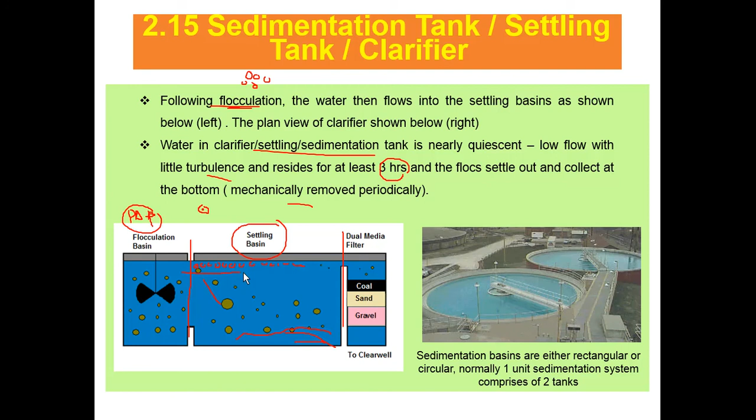Floating, dissolved floating floc - this is another treatment process. In the floc they trap air, so the floc will be suspended, floating on the surface, so they can remove the floc from the surface. This process we call Dissolved Air Flotation, DAF.

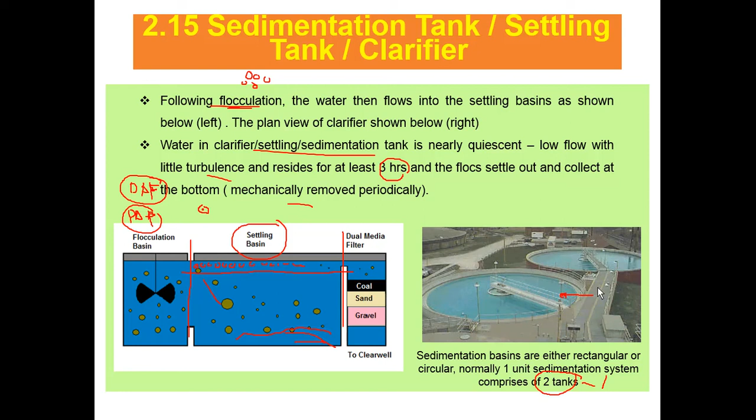In this topic we just introduce the typical process for floc settling. This is the figure for the sediment basin, either rectangular or circular. Normally one unit sedimentation system comprises two tanks - one as backup in case one breaks down or is not functioning, so the water treatment process can still continue.

This is the typical sediment tank - we have rectangular and circular types, with radial flow from the center. Radial flow, hopper bottom, upward flow - the flow goes down and then up. This is the typical sediment tank.

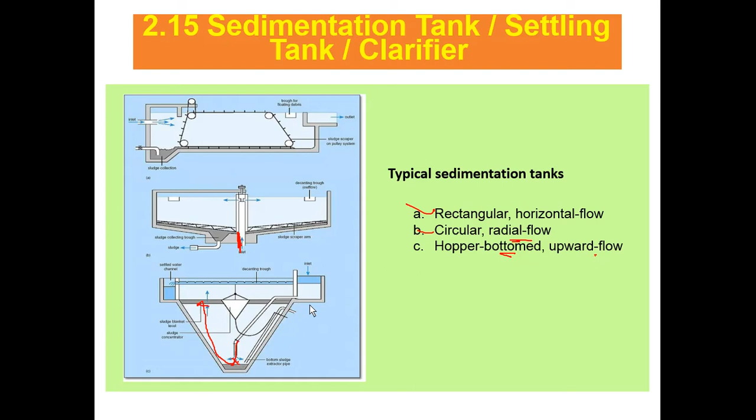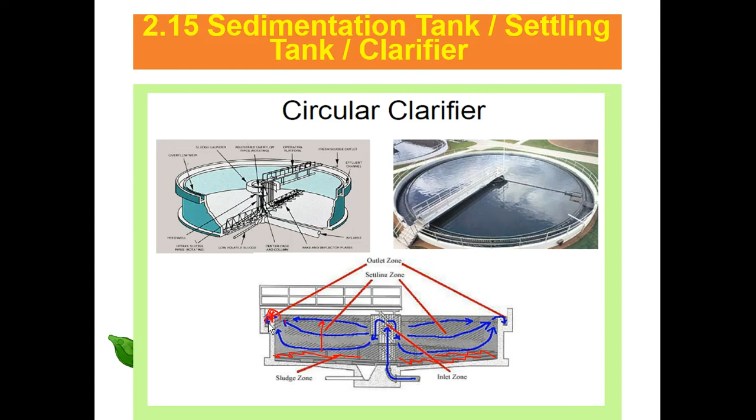Radial flow, close to radial. At the bottom, the floc settling area is the surrounding circular area, and the clean water is at the upper part, where there is a weir leading to the outlet. So they go to the next process for filtration.

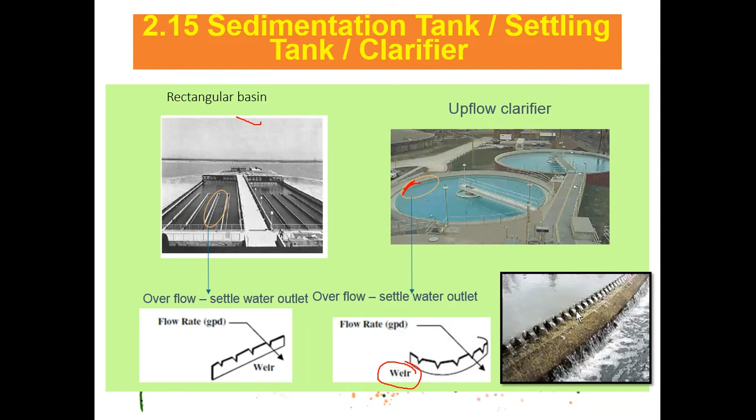The length in meters represents the length of the weir. For example in a circular tank, how long is the weir length in meters - this is for the surface area, to evenly distribute the flow and suspension across the section of the settling zone. This is the inlet, depending on the method of clearance, the frequency of clearance, and the quantity of sludge estimated to be produced.

The purpose is to remove the settled water from the basin without carrying away any floc particles. This is the outlet, where the weir is located. No more floc - all based on the design, all the floc will be settled down in the sludge zone.

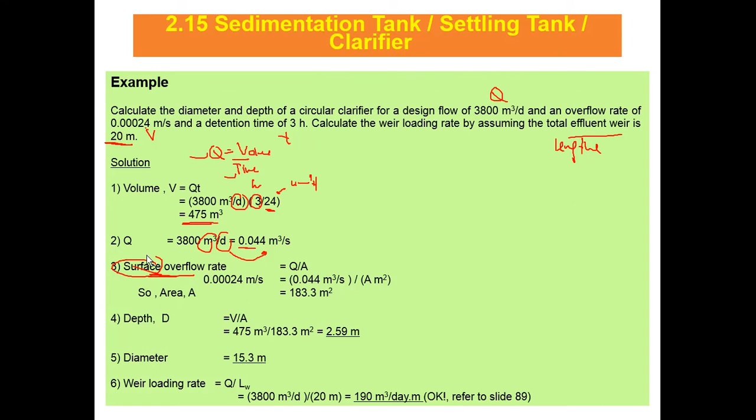Surface overflow rate, surface, this one surface. So bila surface, let's say we have the rectangular sediment basin. Okay, this area is what we want to compute. Kalau circular, okay, so this surface circular, okay circle. So this area, we call this the surface area.

So we know for the surface Q over A. Okay, surface flow rate equal Q over A.

Okay, overflow rate dia daripada permukaan lah, dia akan fill up to fill the area. So Q over A. Q yang kita guna adalah Q ni here. Okay, so surface Q ni, V ni overflow rate ni represent for surface flow rate. Dia berbeza, different with the...

Okay, this velocity ni adalah rate dia, velocity ni adalah surface flow rate. Okay, surface overflow flow rate. Q dah tahu, so we can get the A equal 183.3 meter square. So A ni, A represent rate ni, A.

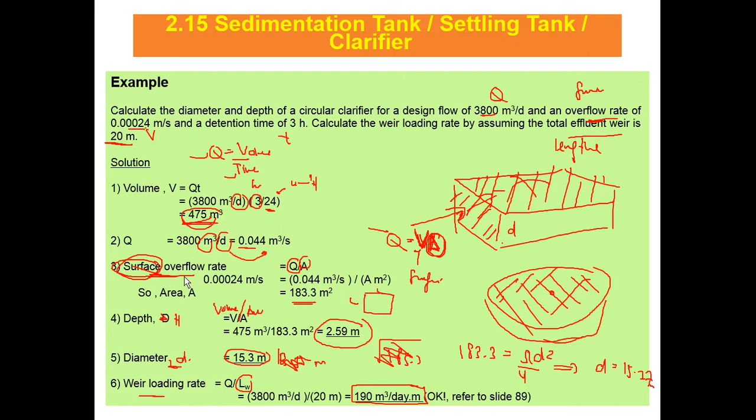Okay, so first convert the unit. Okay, so you dapat meter cube per day. So surface area you tahu tadi, Q equal VA. Okay, so V, Q dah ada. Okay, Q dah ada, this one.

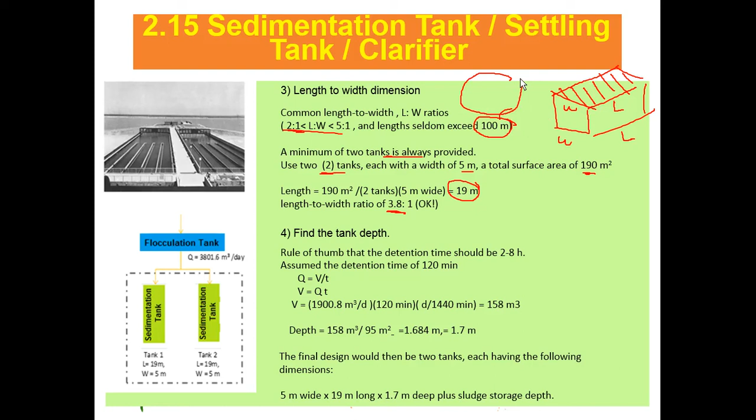It's rare to exceed 100 meters because of the surface area of the treatment plant. If they get the length to 100 meters, better they change the sediment tank from rectangular to circular, so they can save space.

So you need to check here. The 10 we calculated earlier gives 190 meter square, so we divide by 2, it becomes 190 divided by 2, so they get 95 meter square for each rectangular sediment tank. So you divide by 5, you get 19 meters for length for each rectangular basin.

Rectangular tank, there are 2. So here 19, here 19, divided by 2 because there are 2 tanks. Let's check the space between here, okay.

So find the tank depth. Rule of thumb, the detention time should be 2 to 8 hours. This is the guideline I'm explaining here. You should know the basic guideline to design - they have three conditions: surface overflow, detention time, overflow.

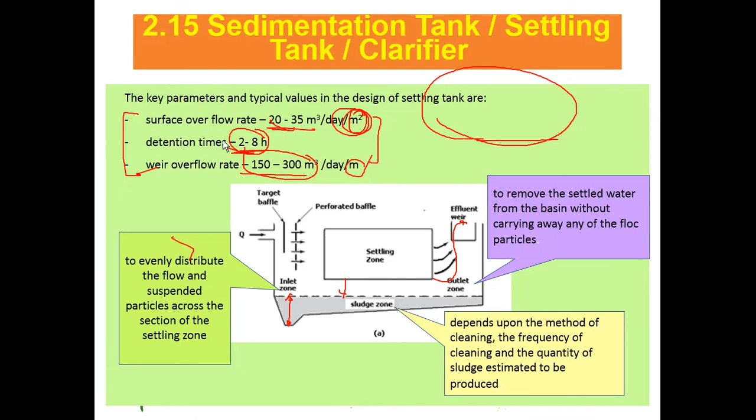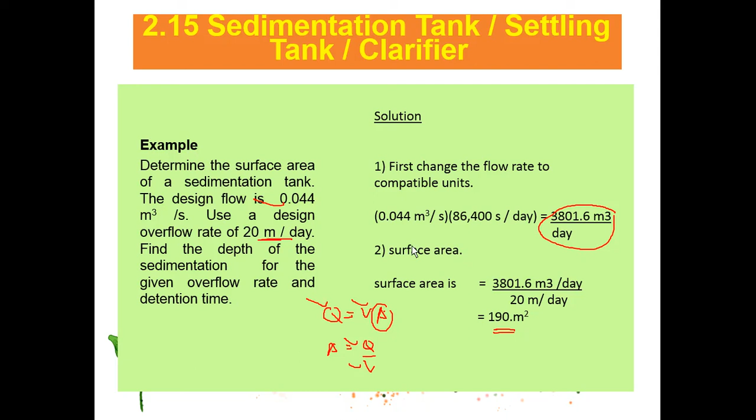So let's say we do for the minimum time, so we get Q equal to 1900.8 meter cube per day. Where does this 190 come from? It comes from here, this one is for all. This 190 is because we have two tanks.

So 3801.6, we divide by 2. So each tank, they divide the Q. 3801.6 splits into 2, Q1 and Q2, tank 1 and tank 2.

So we divide by 2, so they get 1900.8 for the Q. So divide by Q, already known. So velocity, we need to get the velocity. So Q multiply by T, so T is 120, so this one day, you convert the unit.

This one is not velocity, this is volume. Be careful with volume and time - if velocity multiply with A, Q equals V times A. This one, if you use this, this is velocity. This one is area. Q equals V over T. So this one represents volume, this one represents time.

So be careful, which one? Don't get it flipped - this one is not volume, this one is velocity times area. So look at the units - volume, area. Meter per second times meter square, multiply by square, so you get meter cube per second, so that's volume. Make sure meter per second is velocity, meter square is area. This one volume meter cube, time in seconds, typical unit, so you get meter cube per second. So back to the basic unit, to avoid mistakes.

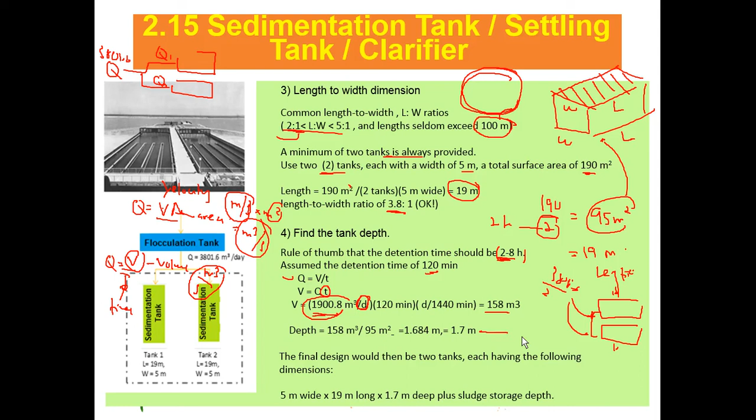So you get the volume 158 meter cube. The 95 comes in here, 95 here, because it's for each tank. This one is for each tank. So you need to know this is for each tank. So the final two tanks, for each tank, is here.

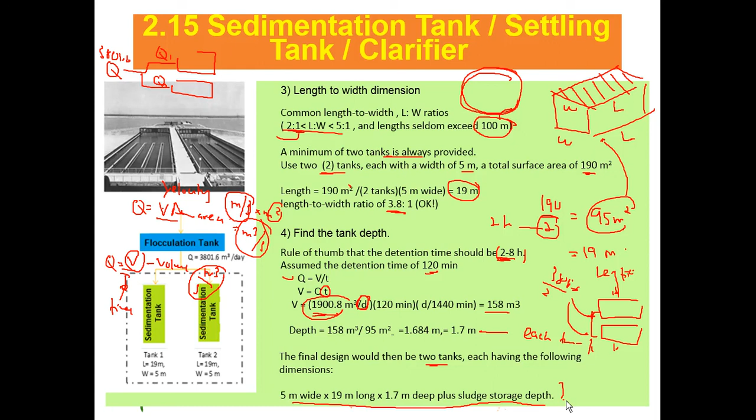This is his design, this is the way you can design for the sediment tank. Basic formula - because this course is just for environmental engineering, so at least you know how to design the basics for the sediment tank. For advanced design, you need to take an elective course for designing water treatment plants. That elective course will teach you more detail.

So in the sediment tank, we have three types - type 1, type 2 and type 3. This type will depend on the floc of the particle, the type of particle. If settling is a discrete particle at constant settling velocity, with no fluctuation during sedimentation, we design for type 1 sediment. For particles that aggregate into floc during sedimentation, you need type 2 - sediment after alum or iron coagulation.

In wastewater treatment, we commonly find this design in the primary sedimentation tank after trickling filtration and in the upper portion of the secondary clarifier after activated sludge treatment. If the particle settles at the zone or blanket, usually there's a clear interface between the settling sludge. This is Type 3.

In water treatment, this settling occurs in lime soda ash sedimentation. For wastewater, it occurs at the activated sludge sedimentation or sludge thickeners. This was Type 1, which I explained earlier. Type 1, Type 2 - this depends on the particle mechanism, or behavior.

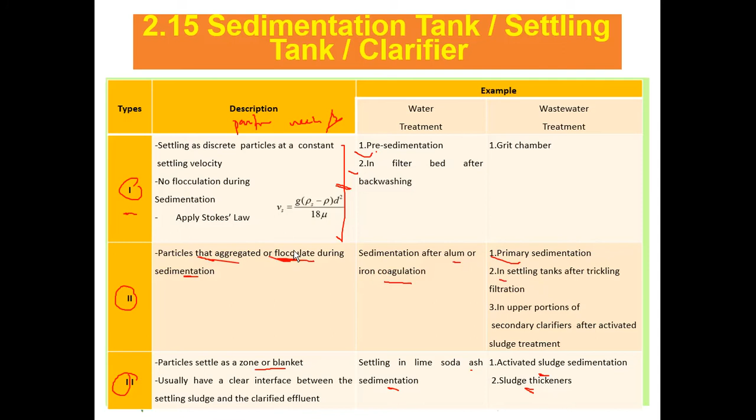This is what we design. If Vs equals V0, 100% removed. If Vs is larger than V0, 100% should be easily removed. If Vs is less than V0, only a fraction of the particles will be removed - to get the percentage, it's 100 times Vs divided by V0.

The continuity: Q at A equals Q at B. So if they're the same, A times VA equals AB times VB.

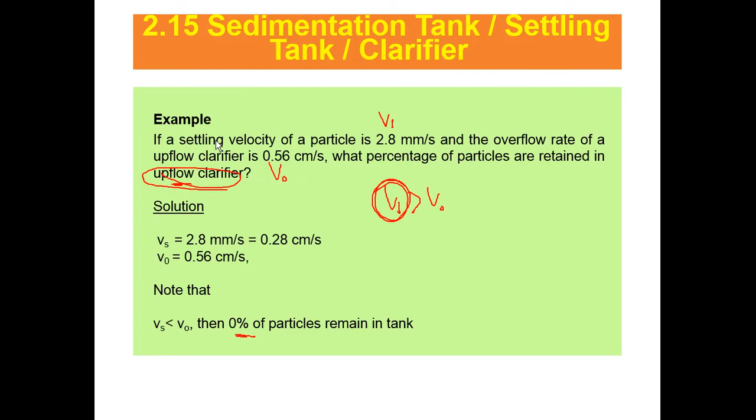For the upflow clarifier, there are only two conditions: either 100% or 0%, that's all. But for the rectangular basin, there are two conditions, and a third condition depends on the settling velocity divided by the water velocity.

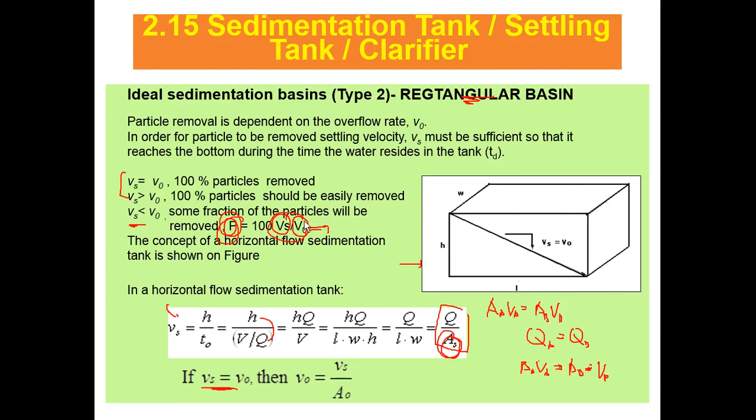So Vs is 0.7, V0 is 0.8 - Vs is less than V0. So to determine the fraction, Vs divided by V0 gives you 88% that will be removed.

Okay, retain means it stays at the stand, will be retained in the sediment. The retain, that means the remove. So 88%, so there 20% or 12% will be going together for the next step.

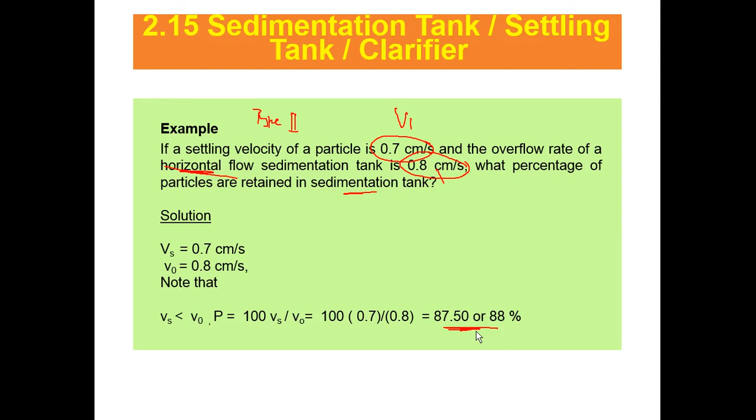Okay, next process. Our treatment plant has the horizontal flow, so you know for horizontal flow, P equal 100 times Vs divided by V0. So you need to find what is the Vs and what is the V0. V0 is the overflow, meter cube per second, and V0 is the flow of water, not for the particle. This one is for the particle velocity, which is Vs.

So you substitute in this formula, and then you know the percentage is 50%. So you need to convert the unit to make sure it's the same, because you need to make the ratio here, so for the ratio the unit must be same.

Okay, let's try to calculate if 0.3, so substitute here, 0.3. When we divide by 0.3, so they get 33%.

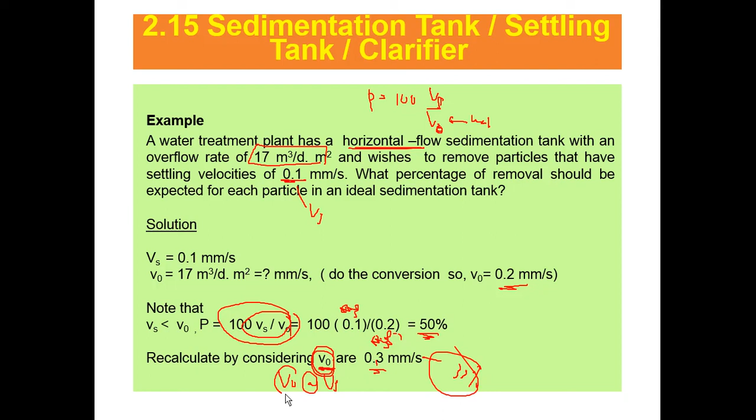So you look at the question properly, either it's asking V0 or Vs. Either one, V0 represents the water, Vs represents the particle. Okay, after completing the sedimentation process, remove the flock or particle at the bottom, depending on type 1, type 2 or type 3.

So the next step is the filtration. Water leaves the sediment tank, but it still contains flock particles, remaining turbidity in the range 1 to 10 NTU. This is the unit for turbidity, 1 to 10 NTU.

This level of turbidity interferes with the subsequent disinfection process, so we need to remove the particle, because we don't want to disturb the disinfection process. So to avoid the particle disturbing the disinfection process, we need to filtrate.

So that's why we need to put the filtration process after the sedimentation process. The EPA said the treated water must be at least 0.3 NTU. To get the 0.3 NTU, the filtration process is normally used. So common filtration used is granular filtration, which is the process of separating suspended or colloid impurities from water by passing it through a porous medium.

They have multi-layers, usually multi-layer sand, or medium, coal, garnet, activated carbon, or ilmenite. Basically water fills the porous space between the sand particles, and the particle is left behind, either clogged in the open space or attached on the sand.

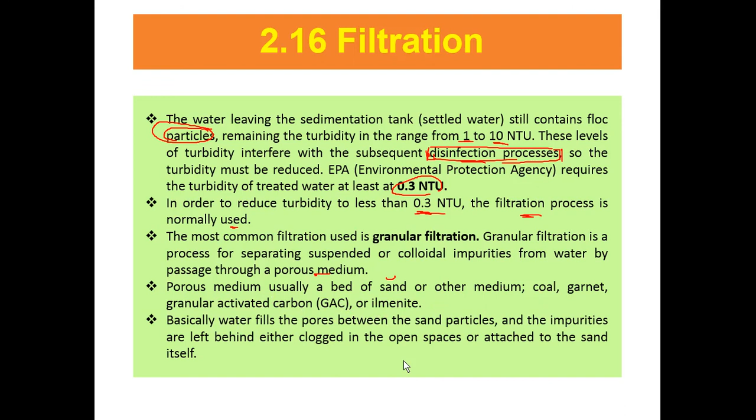Okay, I'll explain a bit. This is the way of the mechanism for the granular filtration. This is just additional notes to help you understand what happens during the filtration process. So the mechanism of granular filtration, first due to mechanical screening, to physically trap the particle inside, so it gets trapped here.

The second one, sedimentation, so the flock goes down to the bottom part. The third is flocculation, so when the process passes through the open area in the granular, they stop here, and they merge together, so they get the flock.

They will be trapped on the surface area of the granular. And the impaction, so it goes to the filtration, presses here, and it breaks, flows, and then gets trapped here.

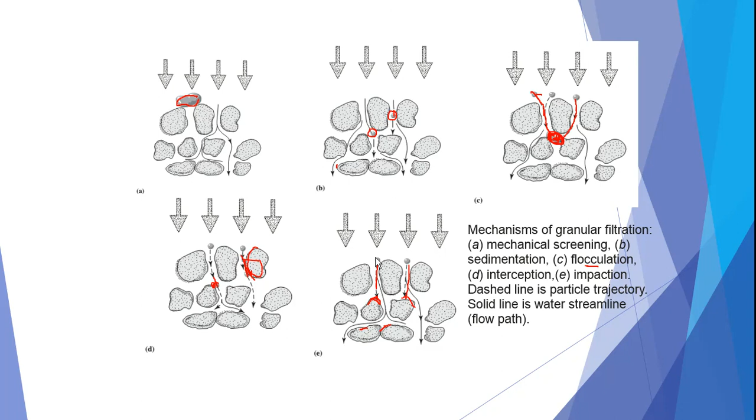This is the way the mechanism in the filtration process works. This is just additional knowledge for you.

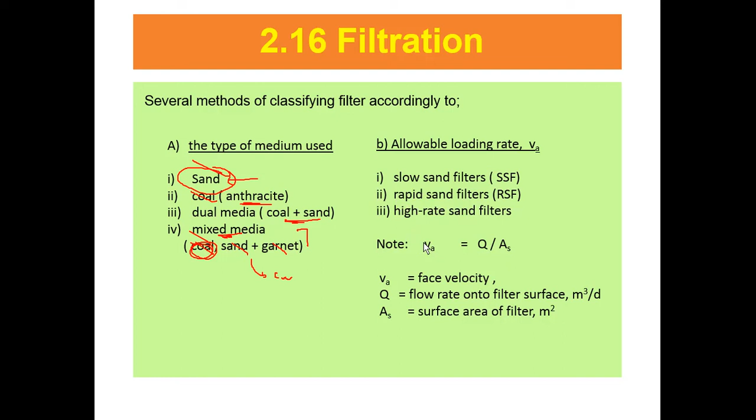Allowable loading rate VA depends on the type, whether slow sand filter, rapid sand filter, or high rate sand filter. This VA is the face velocity, Q over A, where A is the surface area of the filter.

This is the media, there are 3 types of media. This is the inlet and then outlet. The surface is here. This is AS, and Q is the flow that enters here. So VA is the velocity going down.

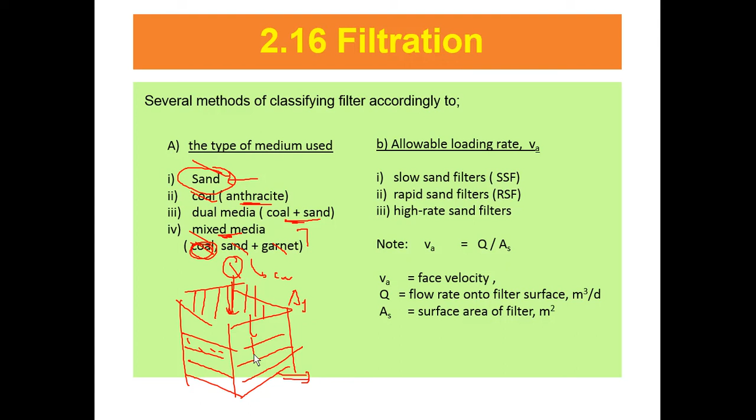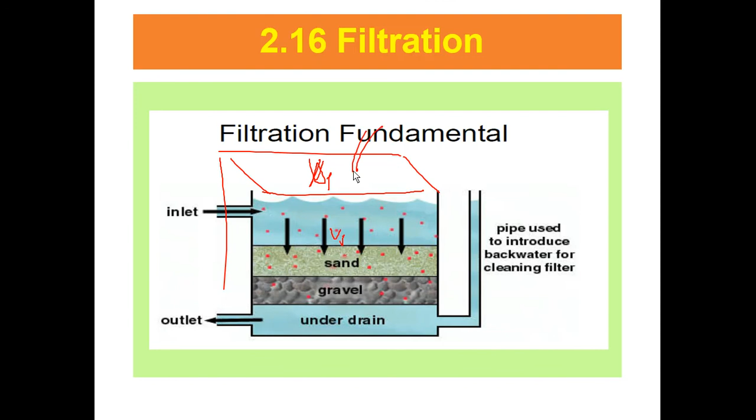This is the fundamental. So at the top here, this is V times AS, so the rate is VA. The volume entering is Q for the water. This is inlet, outlet.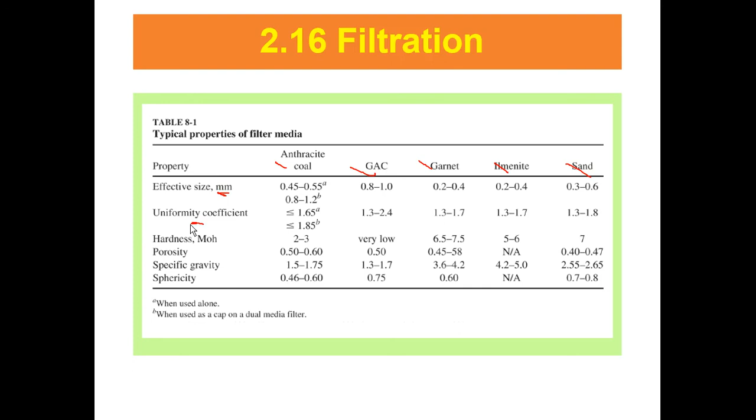This is the typical properties of the filter media: coal, granular activated carbon, garnet, ilmenite, or sand. The effective size, uniform coefficient, hardness, porosity, specific gravity - these are all the properties for the filter media in filtration.

For the filter design, this is the basic formula, Q equals VA, as usual. Q is the flow, V is the face velocity, A is the surface area. You can see how the flow for the system works.

For the slow sand filter, VA is between 2.9 to 7.6 cubic meters per day per square meter. For the rapid sand filter, it's much faster, so VA must be larger than 120 cubic meters per day per square meter.

The removal mechanisms are different, as I discussed. Let's discuss the mechanism. Rapid sand filters are widely used in the US, slow sand filters are more common in other countries. Why do we need the rapid sand filter? Because we want to get the huge volume faster - the faster you do this filtration, the more quantity of water you get.

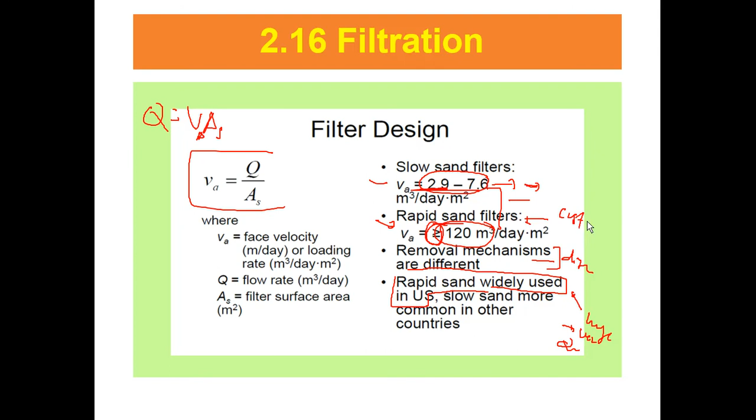This one is 120 cubic meters, this one is 2.9. So which one gives more water volume? The volume for rapid sand is different because we need the quantity. For slow sand, the quantity is less than rapid sand, because they need a long detention time to produce the huge volume. But for the rapid sand filter, the cost is more expensive compared to the slow sand filter.

This is the comparison between granular filtration media - bed depth, run length. This one is 1 to 6 months, but this one is 1 to 4 days, because it's fast. Its filtration rate is the highest.

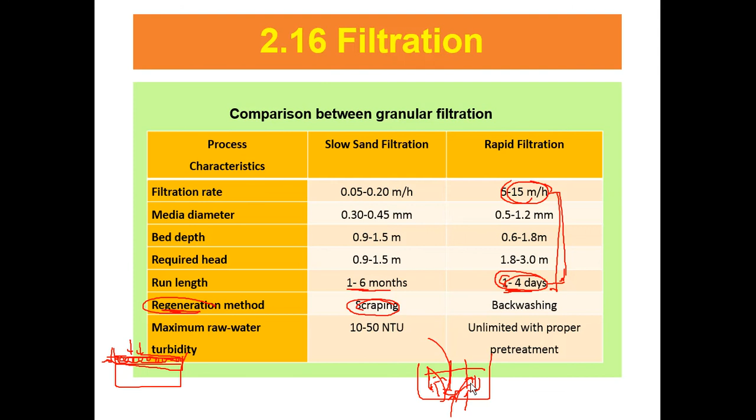Rapid sand filter is also known as depth filtration. Rapid sand filters are the most common type of filter used in water treatment. The filters are cleaned by backwash, for about 10 to 15 minutes, agitating the bed mechanically or with compressed air, washing the water upward to the surface. The backwash water is then returned to the beginning of the plant for treatment.

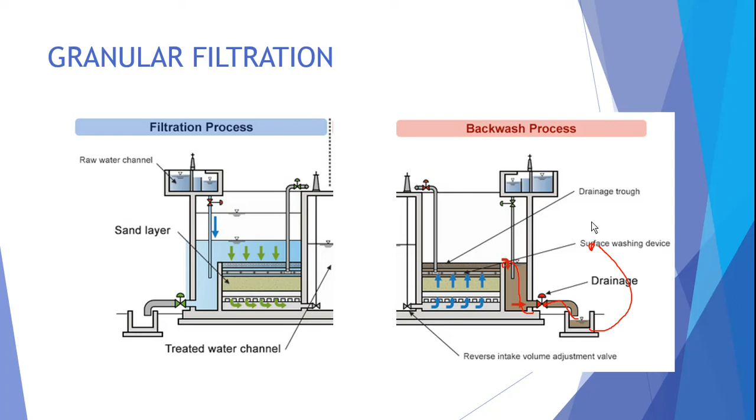Normally a minimum of 2 filters is required, whatever the condition, for backup. If one fails to process, there is another for support. For larger plants, a minimum of 4 filters is suggested.

This is 4 filters. So how do we know it's a large plant? We need to look at the Q. If Q is larger than 0.5 meter cube per second, that means we need 4 filters. If Q is less than 0.5, you can design with just 2 filters.

The surface area of the filter tank is generally restricted to about 100 meter square, except for very large plants. Usually we design around 100 meter square, less than 100 meter square.

If our treatment plant has a huge area, it's okay to design more than 100 meter square. Another factor why we design around 100 meter square is for maintenance, it's easier, and for installation.

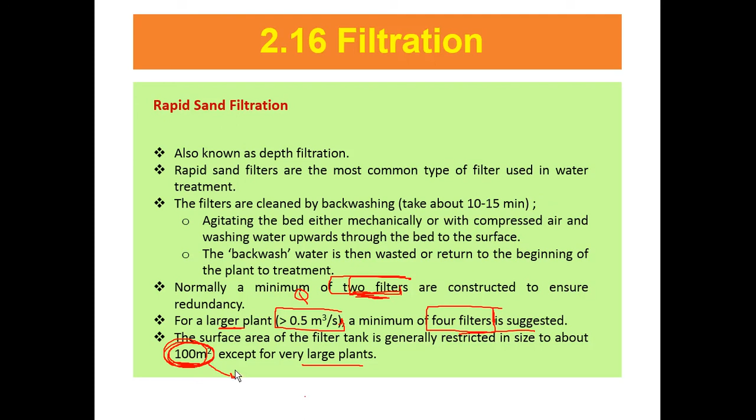Water moves through sand; the top layer removes organic compounds that contribute to taste and odor. The space between particles is larger than small particles, so simple filtration is not enough. Most particles pass through the surface layer but are trapped in the pore spaces. Filtration extends into the depth of the filter.

This is why we need to use the rapid sand filter.

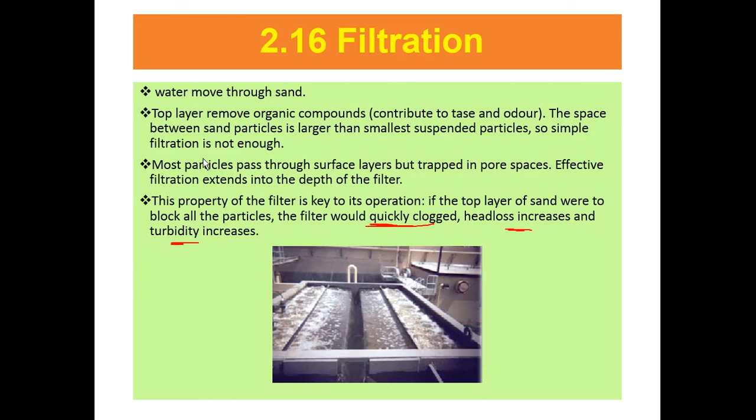The key property of the filter in operation is that if the top layer of sand were to block all the particles. The filter would quickly clog, head loss increases, and turbidity increases. This is the reason why, if the surface is blocked by all the particles, the turbidity of the water cannot be reduced as per the guideline.

This is the example: for a flow of 0.8 meter cube per second, how many filters of dimension 10 multiplied by 20 meter are needed for a loading rate of 300 meter cube per day per meter square?

So this gives V, and this gives Q. We determine Q, convert the unit area, and Q equals V times A. V is known, A is obtained. So A equals Q over V. This gives 230.4. So you multiply with this, and based on the design, they get two filters.

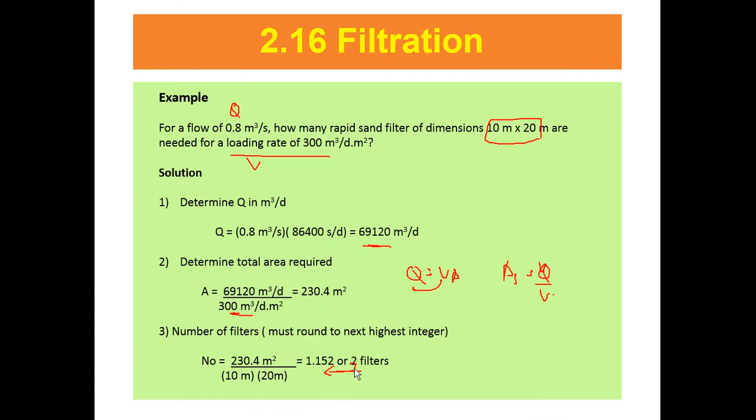If you keep the water for a long time, you will notice greenish, whitish, sticky layers on the water surface. This is what we call Schmutzdecke, which provides effective filtration in potable water treatment.

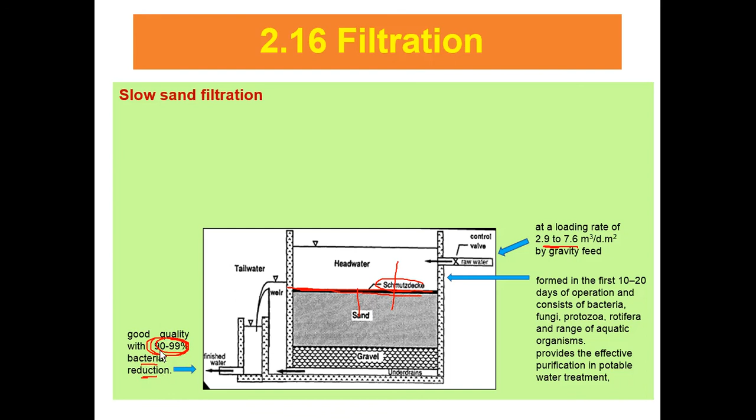It provides good quality with 90 to 99% bacteria reduction. We must reduce it to 90 to 99%, and after that we proceed with disinfection.

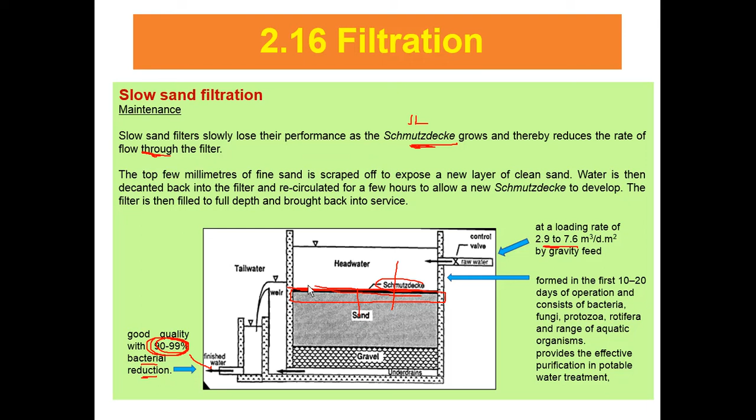Disinfection is used in water treatment to reduce pathogens. Disinfection is not the same as sterilization. Sterilization implies the destruction of all living organisms. Drinking water need not be sterile.

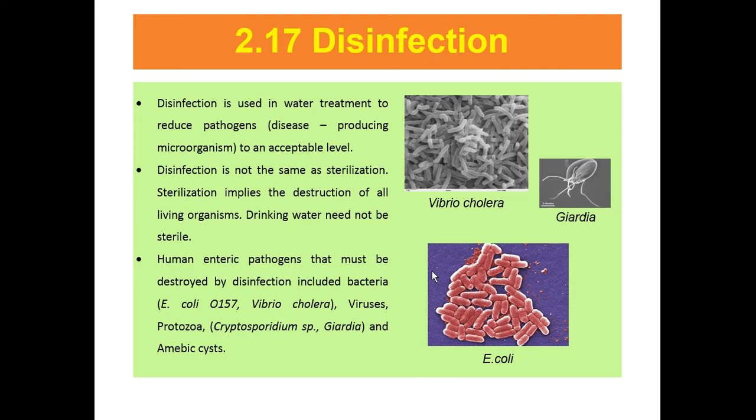Human enteric pathogens that must be destroyed by disinfection include bacteria such as E. coli, Vibrio cholerae, viruses, protozoa, and amoebic cysts. These are the types of microorganisms we need to remove from the water.

What method can we use? We can use ozone, a very powerful oxidant that kills cysts, with no taste and odor problems. It's widely used in Europe, leaves no residual, but is more expensive than chlorine.

Ultraviolet radiation affects bacteria and parasites. Water must be free of turbidity and free of slime and precipitation. This is the requirement. If you want to use ultraviolet, it must be free from turbidity, less than 0.3 NTU for the turbidity, so no residual.

If we use salt, it's more expensive to process but easier to handle, more common for small suppliers. If you're using chloramines, this type is in the form of salt.

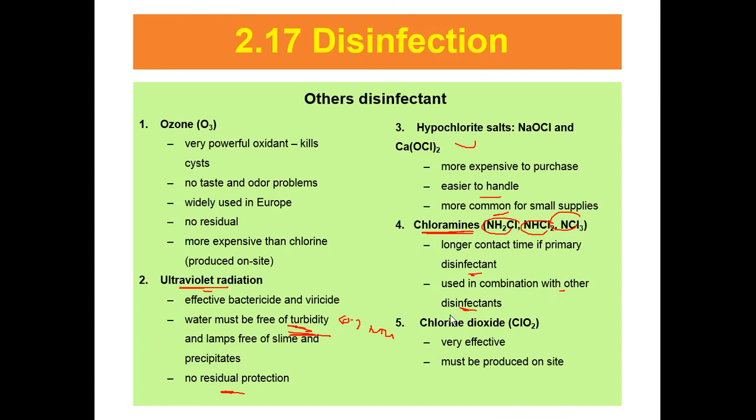Longer contact time if the primary disinfection is used in combination with other disinfection methods. If using chlorine dioxide, it's very effective but must be produced on site.

We always use chlorine. This is the consideration: residual persistence, pH, safety concern, complex equipment, reliable process control.

Operational and maintenance: if we use ozone, it's high maintenance, UV is low. For the complex equipment, it's not easy. Chlorine, this one, no, it's okay; this one, yes.

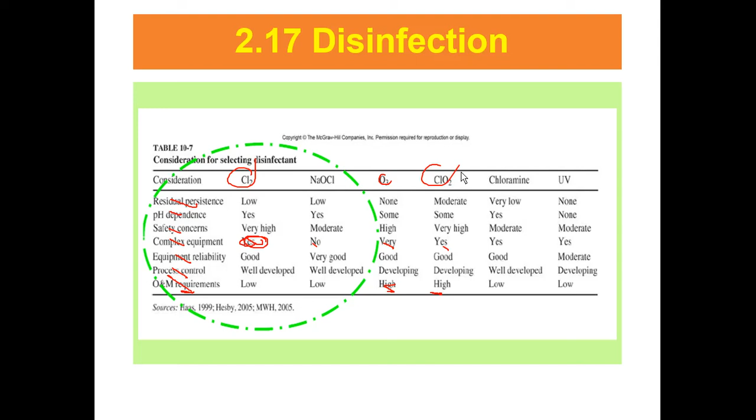So you consider which one you need to select to choose - chlorine, ozone, chlorine dioxide, UV, or chloramines. It depends on these considerations.

Disinfectant: chlorine is the common disinfection chemical used, with 3 different methods of application. For the application, it must always contain alkali to enhance stability. It's more expensive, tends to raise pH, and is safer. The 3 methods of application for chlorine are using gas, liquid, or solid.

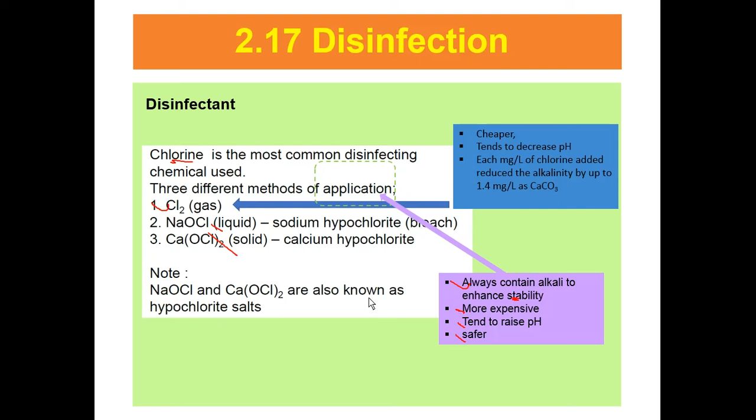Sodium hypochlorite and calcium hypochlorite are also known as hypochlorite salts.

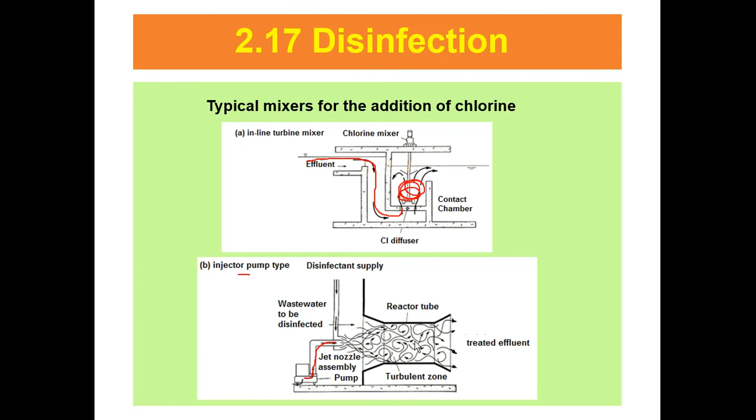Typical mixer for the addition of chlorine: in the turbine mixer, after the sand filter, it will mix here. This is the contact chamber, then it goes to the injector pump type. The pump water mixes with the disinfection here - water after filtration comes in, chlorine comes in, and they mix here. This is the chlorination in the water, chlorine.

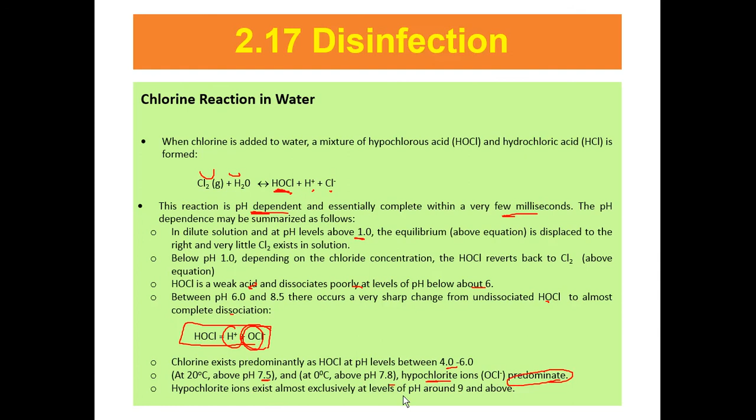It is the condition. To be of practical service, such water disinfectants must possess the following properties: they must destroy the kind and number of pathogens introduced into the water. They must meet possible fluctuation in the composition, concentration, condition of the water. They must be neither toxic to humans and domestic animals, nor unpalatable or otherwise objectionable in the required concentration. They must be dispensed at a reasonable cost and be safe.

Easy to maintain - operational and maintenance, O&M. The strength of the concentration in the treated water must be determined easily, quickly and automatically. They must persist in the disinfected water with sufficient concentration to provide a reserve against possible contamination before use, so it must have residual chlorine - there must still be some chlorine left after treatment.

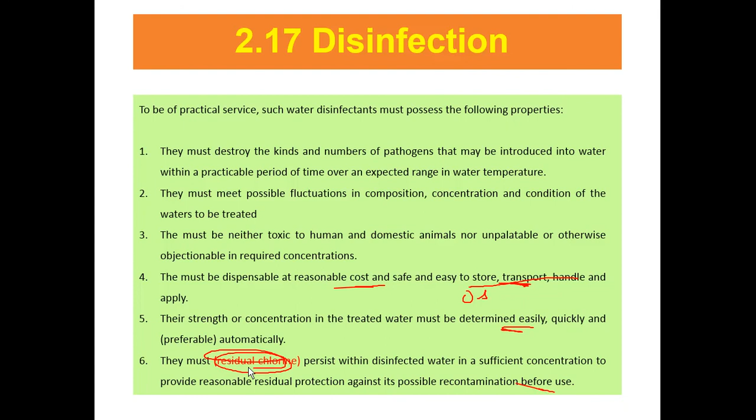What is residual chlorine? The presence of residual chlorine in drinking water indicates a sufficient amount - I think it's 0.2, if I'm not mistaken. 0.2 mg per liter in the pipeline must have chlorine; we call this residual chlorine.

It works to inhibit bacteria and some viruses that can cause disease, and protects from recontamination during storage or supply. The presence of residual chlorine in drinking water correlates with the absence of most disease-causing organisms, and thus is a measure of the potability of the water - the ratio of chlorine in the water.

Chlorine doses and total residual - how much is dosed and how much residual remains.